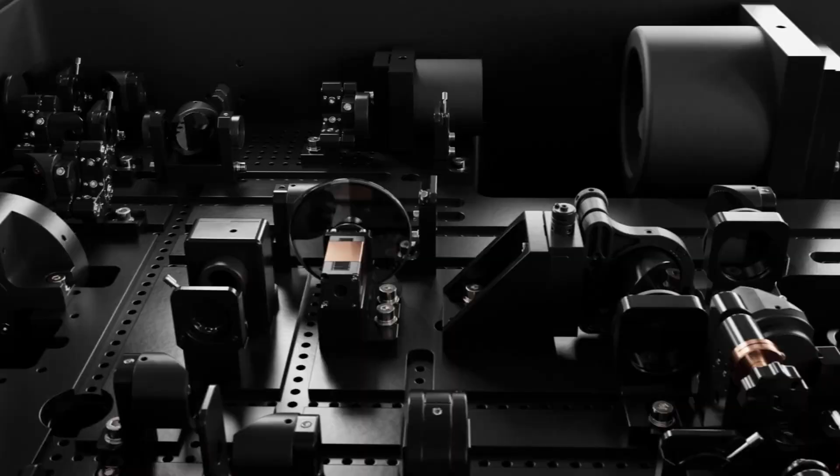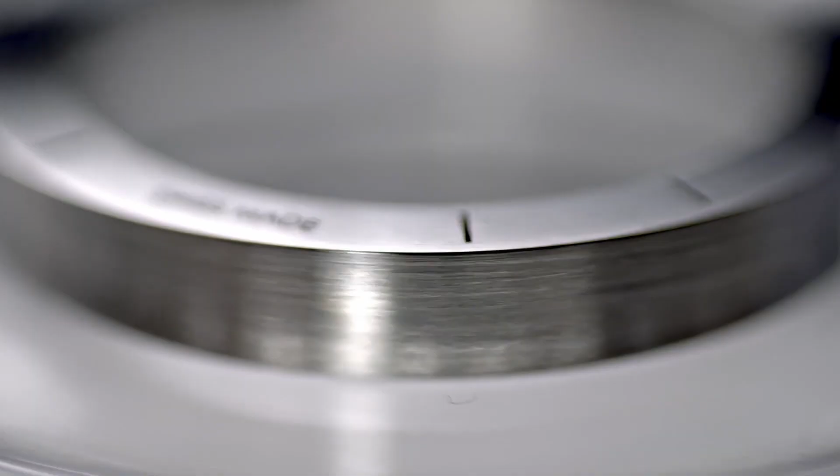Optica is always listening to the changing needs from end users across the world. On Tuesday, March 19th, our 2-hour online industry meeting will examine their needs in laser micromachining. Diverse sectors like automotive, jewellery, watchmaking, biotechnology, semiconductors, textiles, and consumer electronics all have one thing in common: the challenging demands of precision manufacturing are tightly coupled with the need for rigorous efficiency and scalability. But getting things right first time presents formidable obstacles.

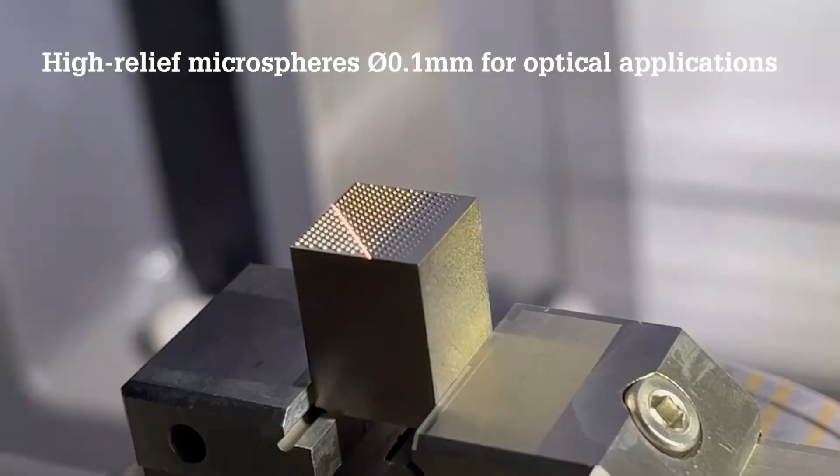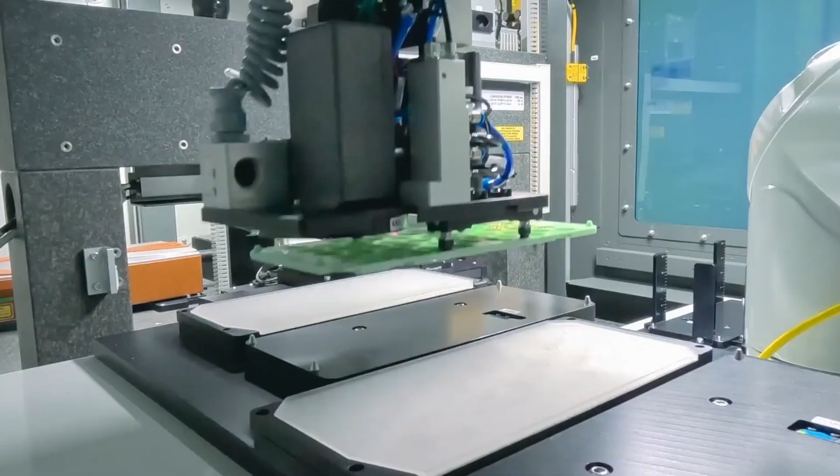Take automotive, where laser micromachining is key in making precise components. There is huge pressure from clients to optimize production speed without compromising quality. That's because product recall is the nightmare scenario for car manufacturers. Similarly, in the jewellery and watchmaking sectors, precision is synonymous with value. End users deal with the delicate balance between achieving complicated designs yet maintaining cost effectiveness.

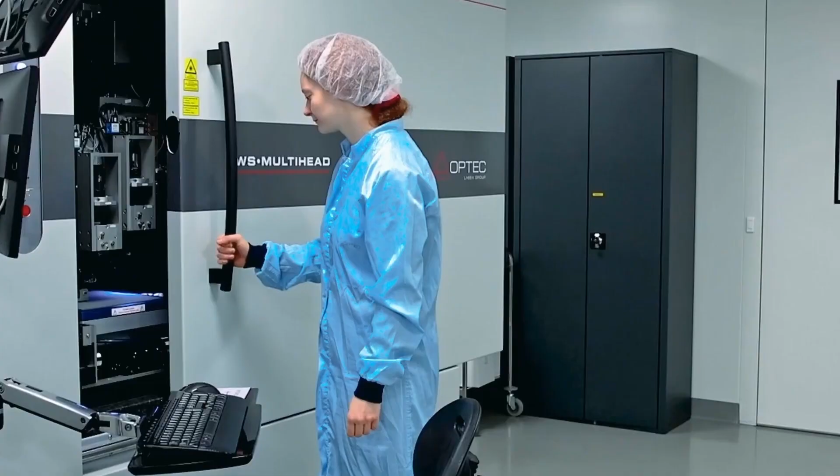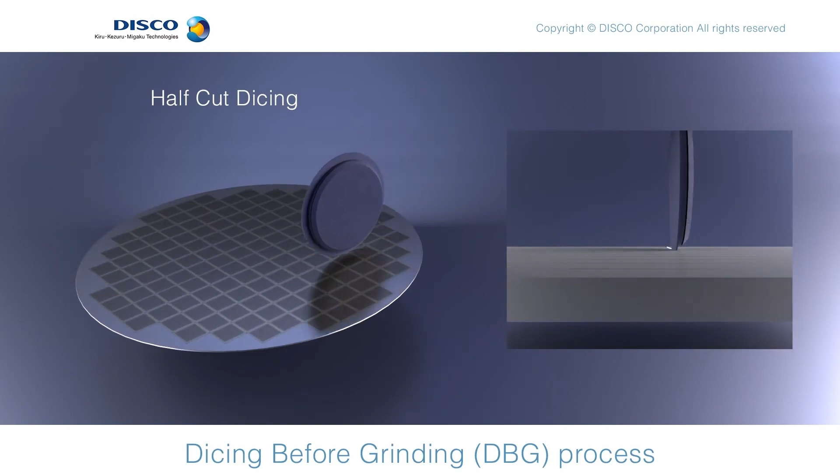And in biotechnology and semiconductor manufacturing, the quest for ever smaller components demands cutting-edge laser technologies capable of sub-micron precision, pushing the boundaries of current capabilities. In the consumer electronics sectors, where smaller and lighter is usually better, partnerships with suppliers offering precise beam shaping capabilities can accelerate sustainable product development.

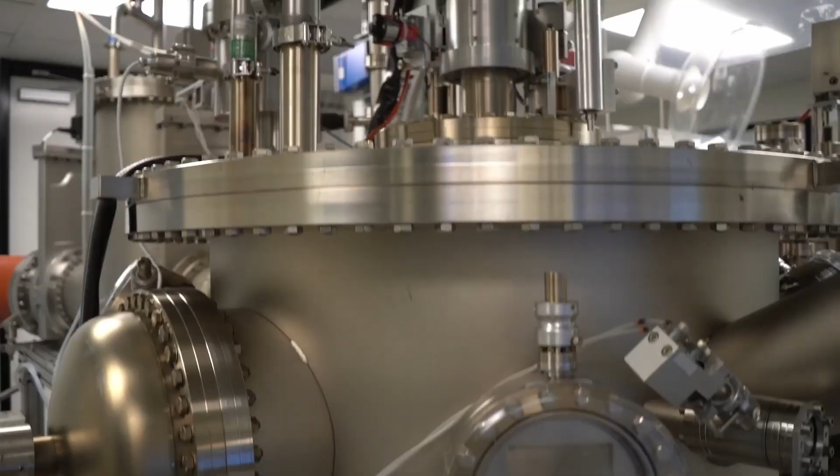So if you are a manufacturer of ultra-fast lasers, laser diodes, specialty fibres, laser optics, if you want manufacturing equipment for assembly and test of laser systems, or if you are looking for the right laser for the right application, then do not miss the chance of making meaningful connections. Prepare your answer to the Optica question and then join us at 7 AM in Seattle, 10 AM in New York, and note the slightly earlier starting time of 3 PM.

On Monday, February 19th, we will hear from the following companies: Akoneer, Disco, Microrayos, Turner Laser Systems, Coherent, Luxinar, Lasea, 3D Micromac, Oxford Lasers, Amplitude Lasers, Cailabs, Direct Machining Control, Litilit, Asphericon, and all the way from Vilnius, Lithuania, Light Conversion. Since to stay ahead you need to collaborate, the Optica question has never been more relevant. So let's start hearing answers now. Indeed, right now, let's start hearing answers.

Thank you very much for joining the Optica online industry meeting on laser micromachining. Today we are global. We have people from all over the world. Over 300 companies have registered for this meeting today. Some of them are joining in the Zoom room, others are joining in YouTube, and most important, all of them are here because they want to connect with each other and find ways to do things they cannot do easily themselves. My name is Jose Pozo, and I'm here talking on behalf of Optica.

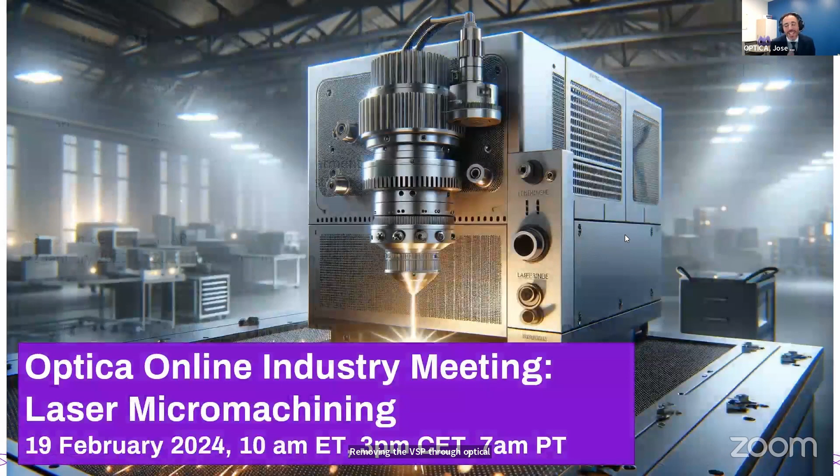As I said in the intro video, we have companies who are the integrators, who come here offering something to the rest of our members - LASEA, Coherent, Akoneer, Luxinar, and Turner Laser Systems - and the companies who come here with an enabling solution - Litilit, Oxford Lasers, Amada Weld Tech, Cailabs, Direct Machining Control, 3D Micromac, Amplitude, Asphericon, and Light Conversion. Our job today is to connect these companies.

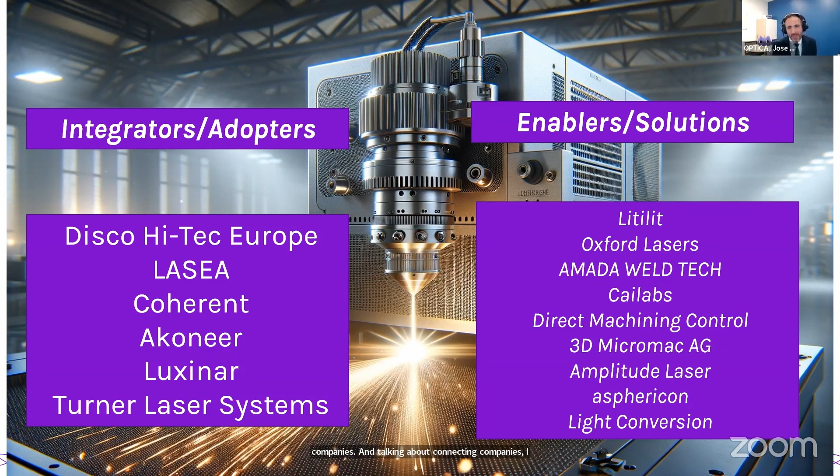Talking about connecting companies, I'd like to tell you about one big initiative of Optica. Many of you have heard this. Optica is building the Global Advanced Manufacturing Alliance. These are all the companies in the Optica membership who are active in optics manufacturing, and you can see them here in the center of this slide.

All our members are looking for metrology, materials, integration into different systems, and that's what we're providing them - contacts with companies who provide coatings, different materials, optical design, software, but also potential customers in the field of laser diodes, photonic integration, data and transceivers, cameras, tomography, everything that companies in optics manufacturing have to do. This is the Global Advanced Manufacturing Alliance.

All the companies in optics manufacturing are going to find ways to connect with potential suppliers and customers. Our kickoff meeting, for those interested, is in Neuchâtel, Switzerland, at the House of Focus Light Switzerland, formerly SUSS MicroOptics, on the 25th and 26th of June. Be there. Let me look a little deeper into this slide.

Let me zoom in on the laser part. Here are the companies who are corporate members today offering laser technology to the optics manufacturers. Thank you very much for all the support. I expect to see you in Neuchâtel on the 25th and 26th of June.

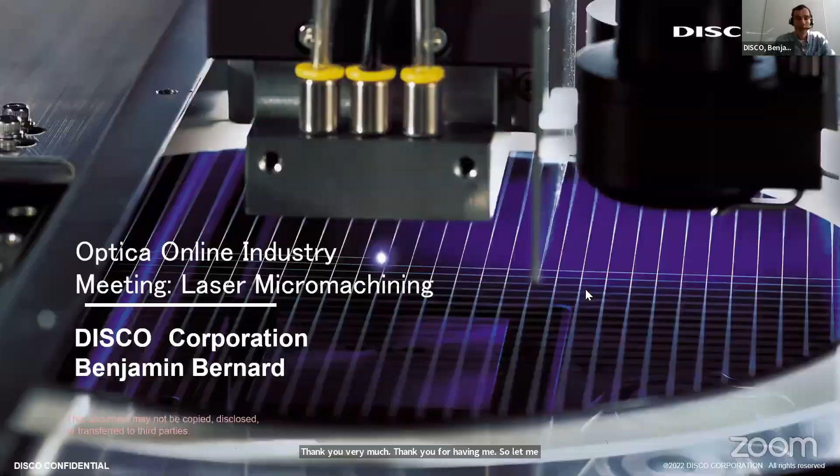Thank you very much, Jose. Thank you for having me. So let me share my slides. Can you see them? Crystal clear. Perfect. Then konnichiwa and arigato gozaimasu for having me here.

My name is Benjamin Bernard, and I'm working for the Disco Corporation. So who is Disco? We are a Japanese company. Our headquarter and R&D center is located in Tokyo, and all our production is in Japan. We have three main plants: the Kuwabata, Kure, and Chino plant. But you cannot only find us in Japan - more or less you can find us everywhere our customers are located. So we have a pretty bright worldwide footprint, as you can see in Asia: Korea, Taiwan, Philippines, Singapore, and China. In Europe, where I'm located, the head office is in Munich, and of course in the US on the West Coast as well as the East Coast. Overall, we have roughly 6,000 employees, and we've sold quite a couple of units already successfully to customers.

So what are our key technologies? We call them KKM. KKM stands for Kiru, Kezuru, Migaku, which means dicing, grinding, and polishing.

Wafer manufacturing process we address, mainly the back-end processes. So grinding of the wafer until you reach the final thickness, then some polishing to have the desired surface condition, followed by wafer singulation and package singulation.

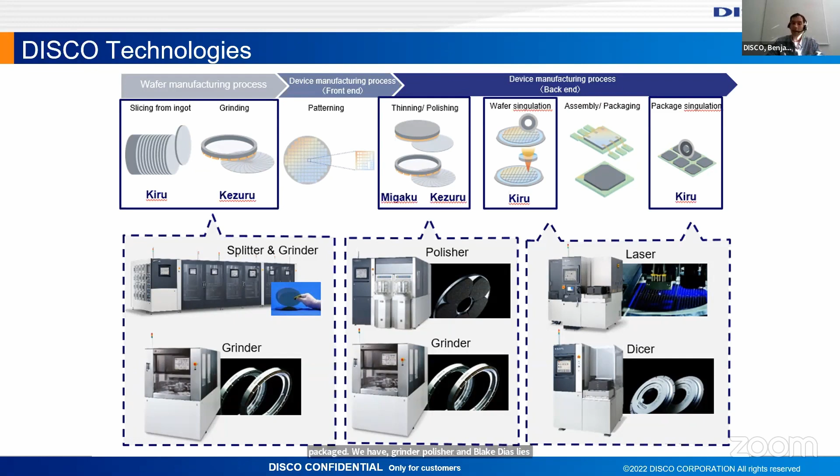We have grinder, polisher, and blade dicers in our portfolio, but I want to concentrate on our laser applications. For the laser applications, we have quite many different approaches.

On the left side, you can see the ablative laser approaches, mainly laser grooving and laser full cut. I will have a slide on it later.

In the center, you see the non-ablative approaches. Here you highlight stealth dicing, where we teamed up with Hamamatsu-san. The idea is to focus inside the material, do a modification, do many of these modifications along your separation line, and then by applying an external stress, you can separate the wafer.

We also have KABRA, which addresses the wide bandgap wafer production. I will have a dedicated slide to that at the end, so I will come back to that later.

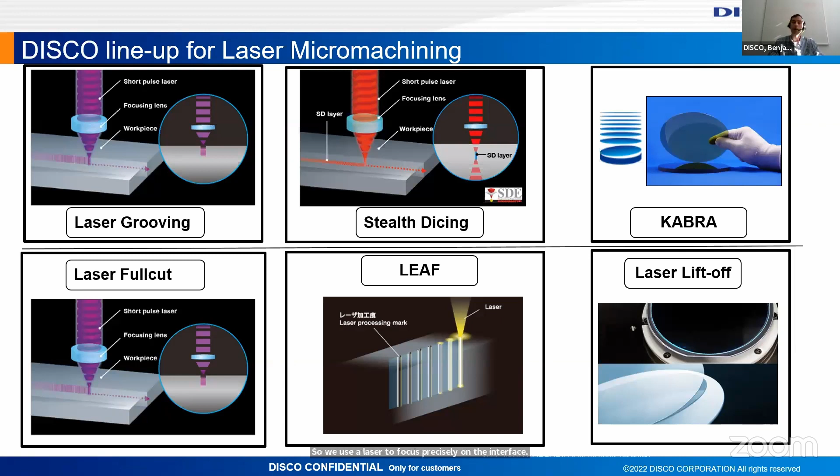Last but not least on that slide, we have the laser lift-off, mainly gallium nitride grown on a sapphire substrate, and then you want to lift off the gallium nitride. So we use a laser to focus precisely on the interface between those two materials, and then you can lift off the gallium nitride layer from your bulk material and transport it wherever you want to have it.

Focusing on laser ablation, and what kind of process strategies are we offering? The main application in the semiconductor industry for the laser is still laser grooving, followed by blade dicing. The laser is used to remove some sensitive top layers or PCM structures like metal structures, gallium nitride that is hard to dice with the blade.

This opens the dicing street for the blade cut, and then you cut the bulk material by the classical blade dicing approach.

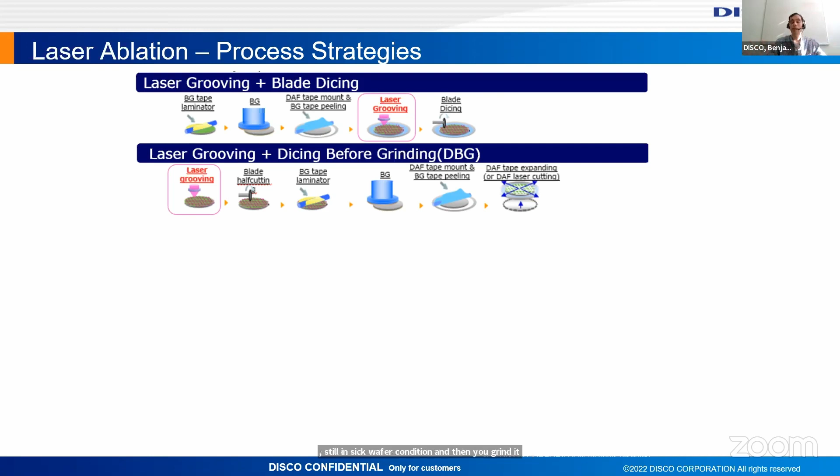Very similar, but a little changed in the sequence, is the dicing before grinding approach. Here you do the laser grooving and the blade half cut, still in thick wafer condition, and then grind it back, and by tape expansion you can release the chips into individual dies.

The third one is the laser full cut. The idea is obvious - you completely cut the wafer with the laser. So you focus on your top side and remove material until you finally cut through.

Another approach, showing quite a lot of synergies between laser grooving and different approaches, is stealth dicing before grinding. We do the stealth dicing modification from the backside. But if you have metals on the pattern side that are hard to expand, then you need to remove them also with the laser.

Last but not least, we teamed up with an American company called Plasma-Therm, who provides plasma dicing equipment - shout outs to my colleagues from Florida. Here the idea is that with the laser we can remove metals that cannot be plasma diced, or also open the resist. You can use our spin coating as a resist for the plasma dicing, and then the laser grooving opens the resist at the positions where you want to interact with your plasma.

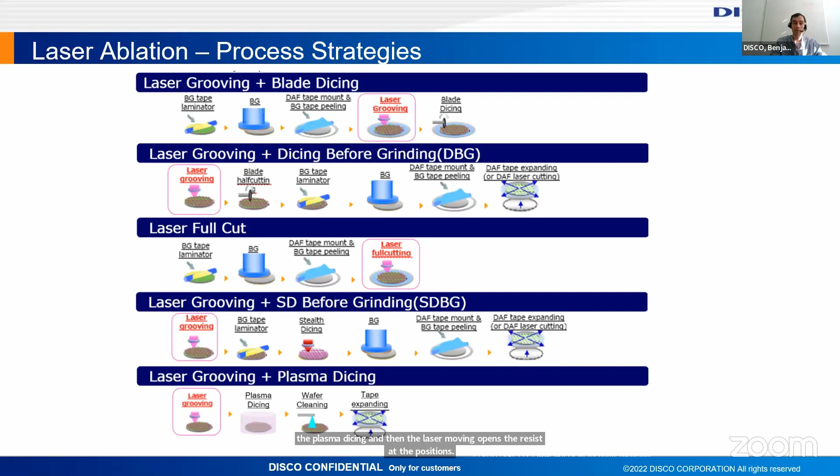One example I want to show you for a classical grooving process is here - gallium nitride, a wide bandgap material. For the grooving process itself, it's key to not create a significant thermal damage zone on your bulk material, because after the blade cut this will reduce the mechanical robustness of the die to succeed the subsequent process steps.

But as you can see here, if the conditions are correctly chosen, then you get very clear and defined cutting edges, very smooth surface roughness, and defined grooving depths. Also for wafer-to-wafer bonding applications, it's important to have very little recast or burr, because this transfers into a larger area that is not bonded on your device.

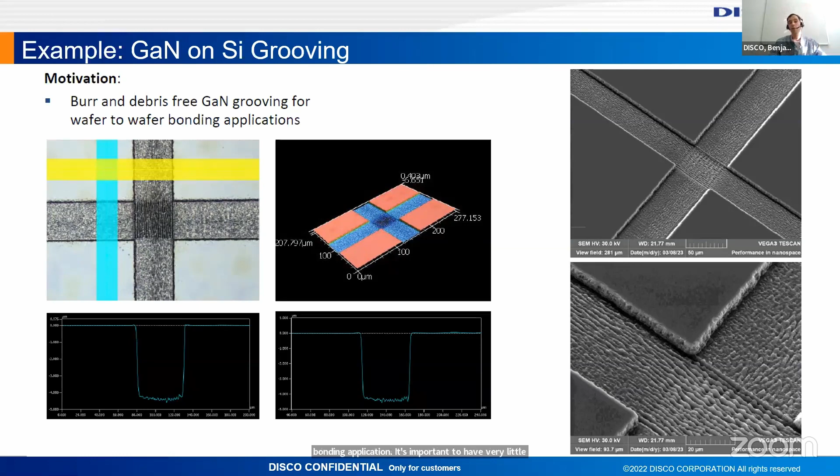The last slide I have is focusing on silicon carbide wafer production. Due to electrification and the need for many inverters, wide bandgap materials gained a lot of attention lately. The classical approach is you grow the silicon carbide in a chamber.

You have a certain boule, and then you cut with a wire the silicon carbide wafers from this ingot. We thought we have a better solution using a laser to focus inside that ingot, creating the so-called KABRA layer. Then by some subsequent process steps, you can get your wafer split from the ingot.

On the image here, you can see our fully automated tool. More or less, you can store several boules, several cassettes for the wafers. Of course, after one wafer splitting, you need to do some reconditioning of the surface to make it optically in good condition again. But this tool can do it all in one line.

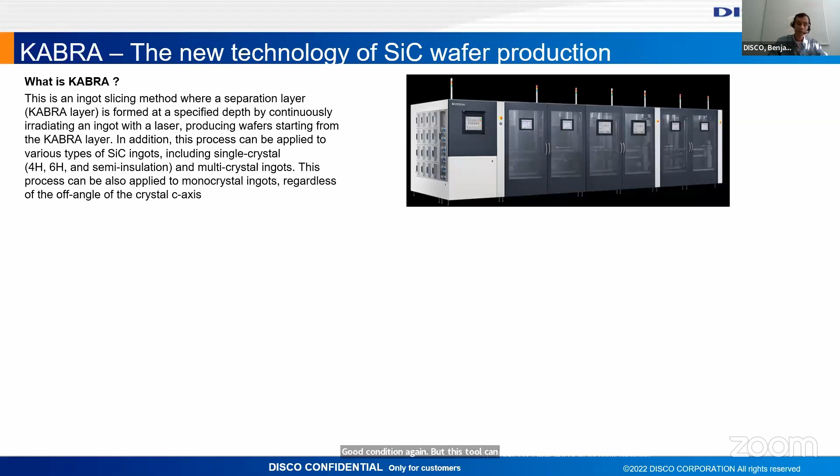Compared to the classical wire saw, we could significantly reduce the process time to generate these wafers. Also, due to the precise and gentle interaction of the laser, we could skip some process steps, so you don't need to do so much preconditioning after the splitting.

And finally, which really is directly money in the pocket of our customers, we can reduce the kerf loss - that means the material that is wasted when you cut silicon carbide from the ingot. So that is our approach for silicon carbide wafer production, and we call that KABRA.

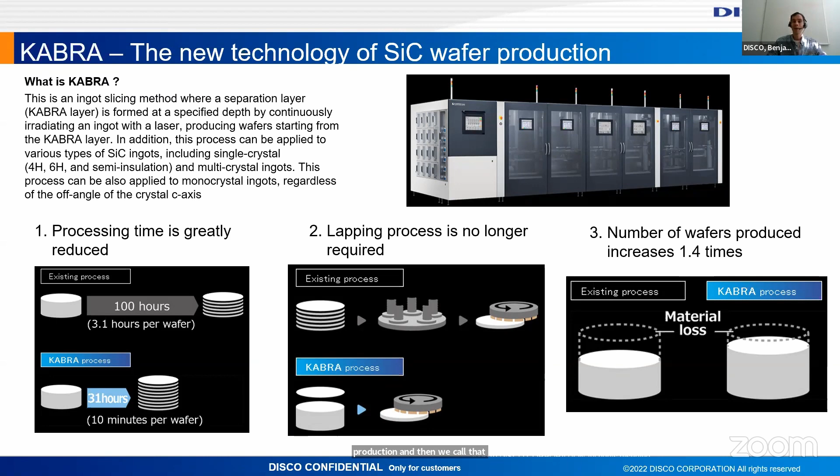Since I just had 6 minutes, I'm almost through. As you can see, we try to work really on the cutting edge. We have good relations with all our customers, and we are able to integrate the newest technologies into the semiconductor device manufacturing market. So please keep in mind: Kiru, Kezuru, Migaku, Disco.

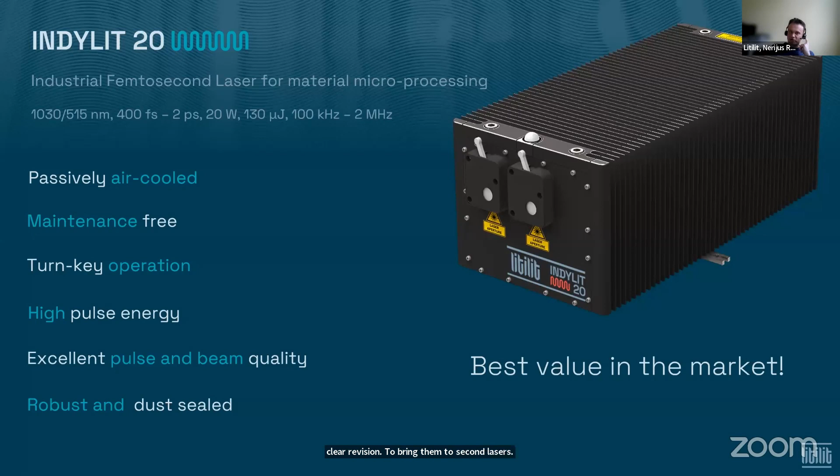So at Litilit, I think first of all that everybody in this meeting agrees that laser micromachining is the future of precise manufacturing, right? So starting from there, our company Litilit has a very clear vision to bring femtosecond lasers, which are enabling technology for microprocessing, to the commodity level. In this way, we seek to advance the industries by offering well-designed, reliable, and affordable femtosecond lasers.

Today, I would like to introduce our newest development, the INDYLIT 20 laser. It has optical parameters specifically tailored for micromachining applications, for many of which medium average power level, but relatively high pulse energy, excellent beam and pulse quality are required. The laser is unique in the market by providing 20 watts of average power and 130 microjoule pulse energy in a very compact, robust, and dust protected, passively air-cooled package. We firmly believe that for... If you want to be convinced, contact us regarding trial tests. This is it from my side.

Thank you very much. One thing that we would like to go back to Disco about: in many different ways, we have been discussing the difficulty of integrating lasers and using standard components. From the point of view of Disco, do you see a challenge? Do you see a potential solution that can be solved by simplifying the laser system? Yeah, I mean, in general, we're trying to keep it as simple as needed, but as complicated as it has to be. So yeah, I understand your question, but hard to comment. In general, yes, simplification is good, but certain process steps need some.

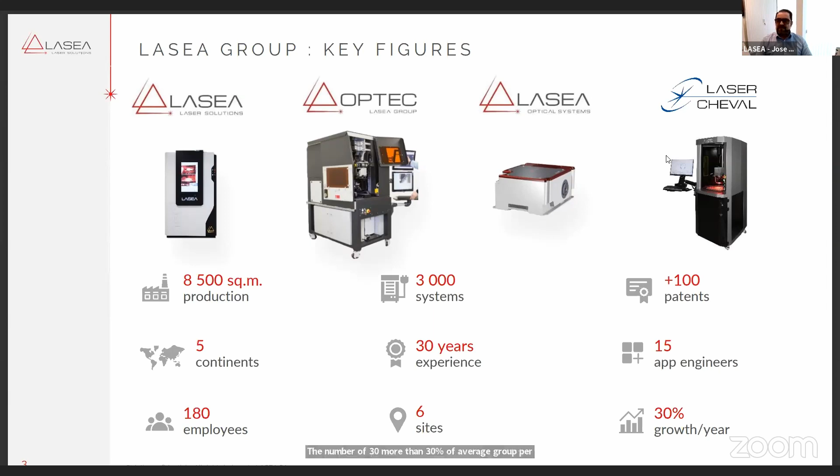We have as well facilities in Switzerland and in the USA. Together with other representatives, we develop our activity on the 5 continents. Here we represent the countries where we have already installed machines, and we have more than 3,000 machines installed around the globe.

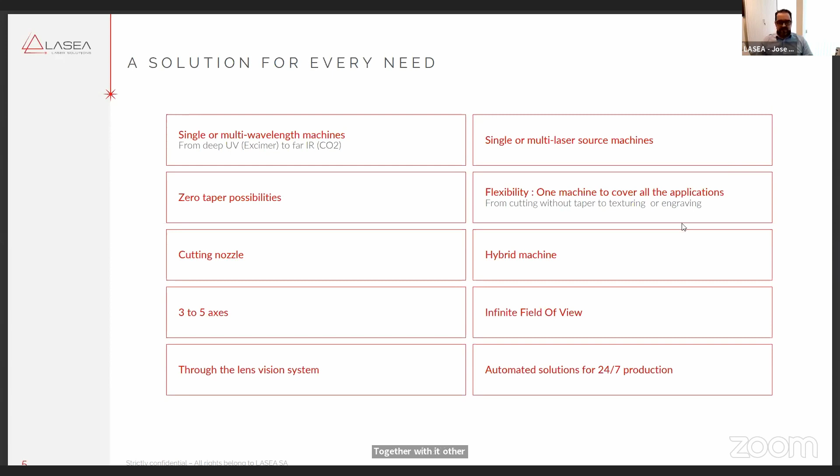So we like to say that we provide a solution, not just a laser machine. We provide a solution that is based, of course, in our expertise, that is very broadly developed around the use of femtosecond lasers. But again, as we say, we provide a solution. That means that sometimes we integrate other types of solutions, other types of lasers, depending on the application, together with other characteristics, and always around providing a very, very accurate laser system, laser solution.

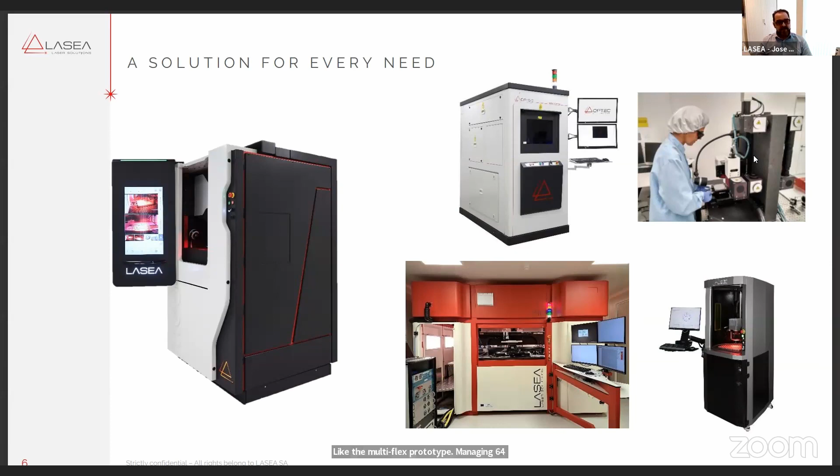How do our laser solutions look, our machines? So these are just a selection of a few of them. For example, on the left, the most recent concept of machine developed for high accuracy and high productivity applications. But we have other solutions, for example for research, or developed in the frame of research activities, like the MultiFlex prototype managing 64 beamlets in the same system that is installed in Aachen at the Fraunhofer ILT as a result of an R&D project.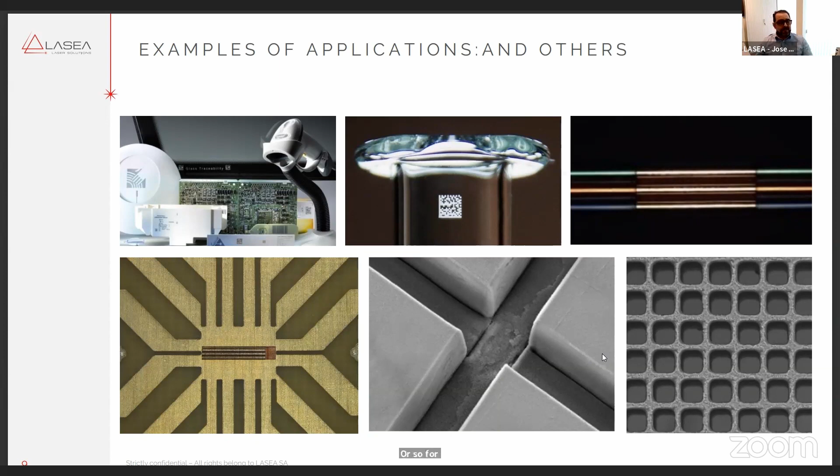To conclude, we provide efficient and reliable high-precision laser solutions for micromanufacturing. Our solutions replace more polluting production methods, so we help in achieving more sustainable production. We help as well in developing solutions in the area of miniaturization or functionalization of surfaces, allowing the design of new, more efficient or improved products. We do this using cutting-edge technology and with a collaborative and innovative spirit. All this helps us provide laser solutions that help progress the field of microtechnology.

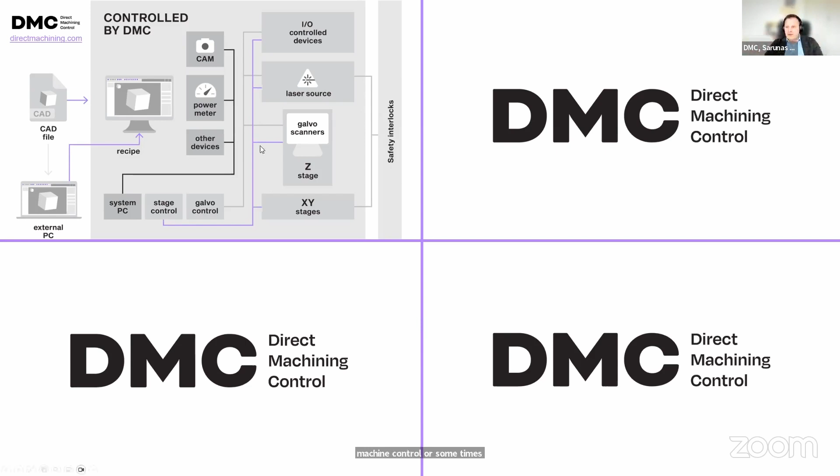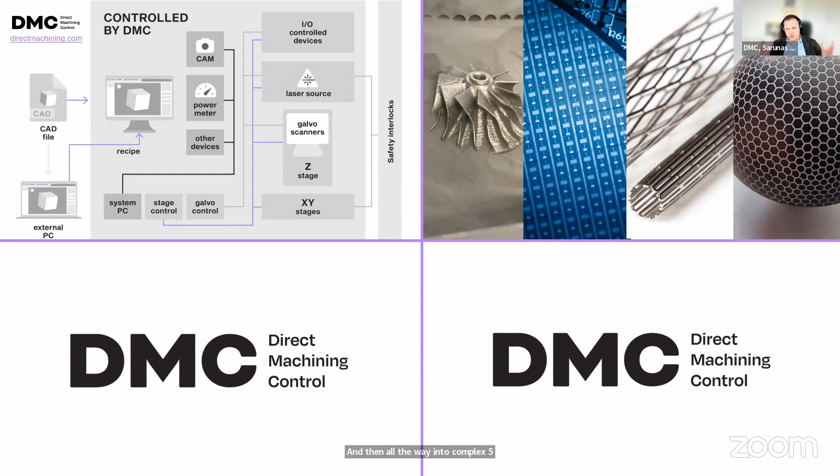The applications that we support are very wide ranging, from additive manufacturing to various laser micromachining cases in semicon, medical, electronics, and then all the way into complex 5-axis system control, freeform surface processing, sometimes involving robots. And in terms of capability, DMC can easily handle simple applications, but it has a lot of advanced capabilities: freeform shape processing, kinematics, working with 3D CADs, the integration of sensors, scanning the surfaces, adapting processes based on that, camera integrations with machine vision.

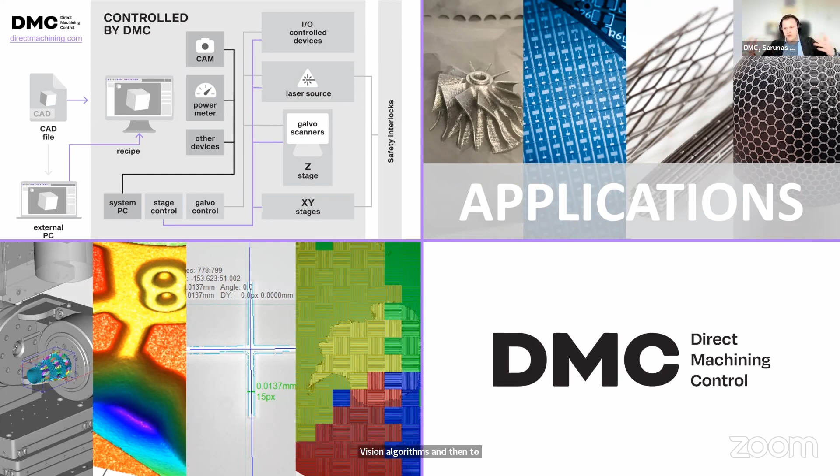DMC has its own vision algorithms, and then to complex control where we can control multiple systems simultaneously, load balancing, special strategies, or cases where we need to process millions of objects, rows to satisfy some throughput requirements.

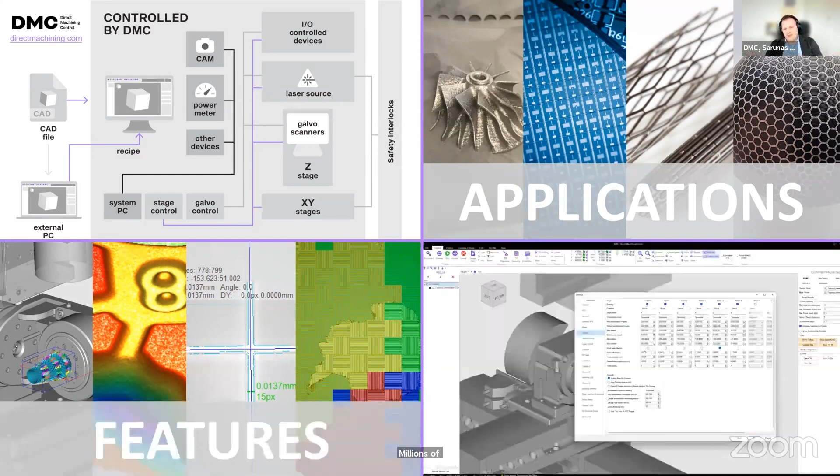And then the last question, how can you use DMC? And there are 3 ways to do that. You can start with a standard interface, which is very flexible and perfect for application development. Then you can, of course, integrate that into your own application, or we can develop a custom HMI for you. So basically, DMC can take care of the whole way from application development all the way to the fully integrated industrial solution. And that's my quick intro of it.

Thank you so much, Sarunas. So this is very good because actually we have here a lot of lasers. So coming back a little bit to Brennan. So Brennan, what exactly do you need from the lasers? What do you need from the laser manufacturing?

Well, most of our applications today require femtosecond lasers. It was discussed before, but we do focus on very clean, very short pulses. Some of the applications are so sensitive that the difference between a 250 femtosecond pulse and a 500 femtosecond pulse is actually notable.

And then from the controls side, we're finding more and more that we really need advanced control systems, not just for motion, but also for coordinating the motion systems with the advanced galvanometers, multi-axis scan systems. So really the full range of integration equipment is essential to making sure that our systems work properly.

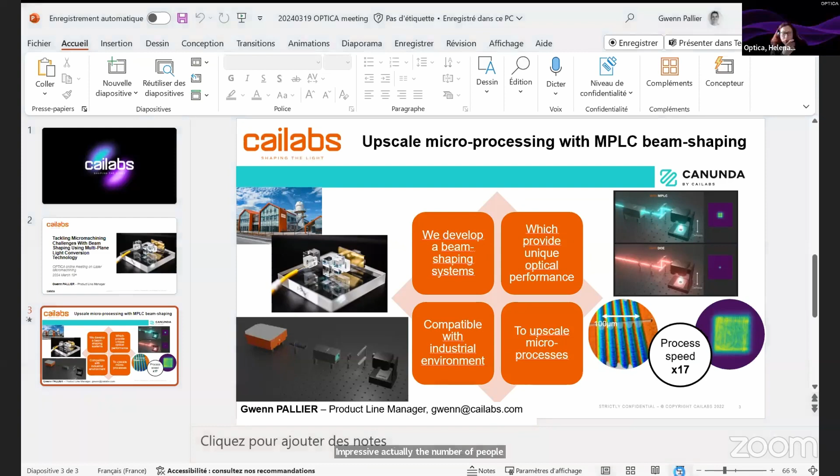Hi, Helena. Can you hear me well? Very well. Perfect. Give me a second to share my screen. It's really cool to be here. Hi also, Jose. Always nice to spend time with you guys. Impressive, actually, the number of people who join. So, okay, your sound is a little bit distorted now. Sorry. Can you hear me now? Now better. Okay, cool. Is it full screen?

Yes. Okay, perfect. So Cailabs in short, you can recognize, Helena, the building on the top left. This is where we are. We are actually a French company developing beam shaping systems. What we developed since the beginning of the company 10 years ago is what is called MPLC, for multiplane light conversion. And this is what you can see on the left, an example for telecommunication.

The idea is to provide something which is quite unique. I have to make it short, so I would just say that this is not a DOE, this is not freeform optics, this is not beam shaping in the laser, this is multiplane light conversion. And it provides different performance, optically speaking. You can see, for example, on the top right, an image when you're defocusing with a system of ours or with something based on diffraction, the beam will behave very differently due to the technology behind the beam shaping. So because you have different performances, it can also enable different things.

And the idea is also to develop solutions which are available and compatible for the industry and the constraints of being inside the industry. So I'm pretty happy that I can come after the laser talk, because in my opinion, kilowatt lasers are the future, but they need proper beam shaping, because one beam with so much energy, because generally it goes with high energy, not only high power, is actually pointless. I guess everybody agrees on that in the room. And the idea is to shape it properly.

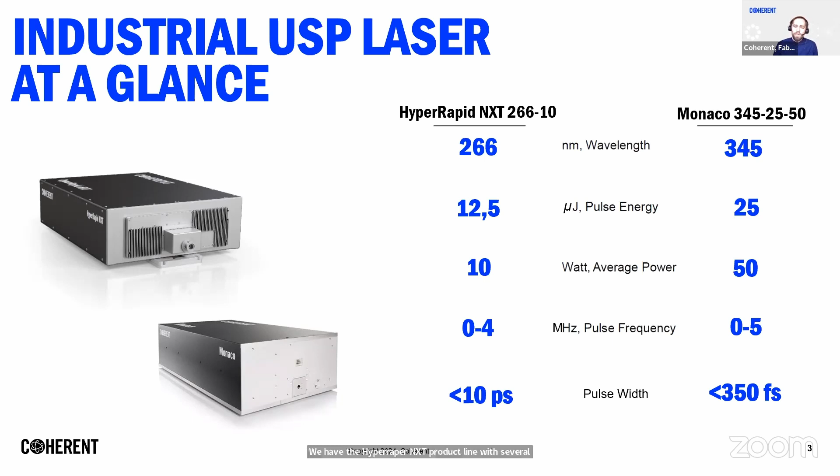Focusing on two products, and specifically in the solid state design for lasers. We have the HyperRapid NXT product line with several thousands in the field with the 266 version. We have the Monaco femtosecond laser with a UV version. And of course, I would say today the pinnacle of solid state lasers being the Python with up to 2 joule single pulse energy or up to 4 joule with the twin Python.

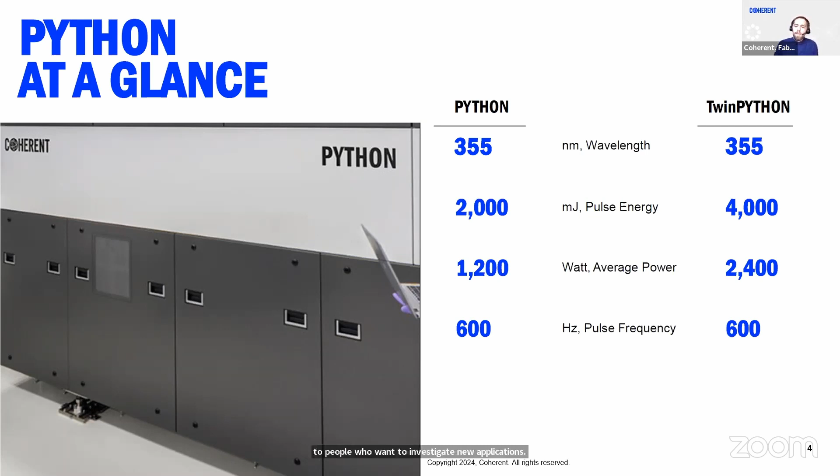So these are the sources that Coherent can provide, and we are really with a strong expertise in designing these laser systems. However, what was really needed to help the industry move along is a center or a place where these lasers can be made accessible to customers, to people who want to investigate new applications. So 6 years ago, Coherent started a cooperation with the ILT Fraunhofer, first for excimer lasers, and 2 years ago, we expanded this cooperation to include ultra-short pulse lasers as well.

The idea here is that the expertise of Coherent providing these lasers, designing these lasers and making them available to the ILT Fraunhofer in Aachen would be combined with the capability and knowledge of the ILT when it comes to system technology, robotics, and specifically to diagnostics and analyzing applications. So today, the ILT Fraunhofer and UV Center of Excellence on site have multiple laser systems, not just standing around, but actually in tools available to researchers, available to customer requests to investigate cutting-edge applications, but mainly investigating the next generation of laser micromachining applications.

And this with comparing UV with deep UV, comparing femtosecond with picosecond, or directly comparing ultra-short pulse lasers with excimer applications. And this is something that is not easy to do elsewhere in the world. There's only a few places where you can really do this with the same samples on the same ground, on the same conditions, making one-to-one comparisons.

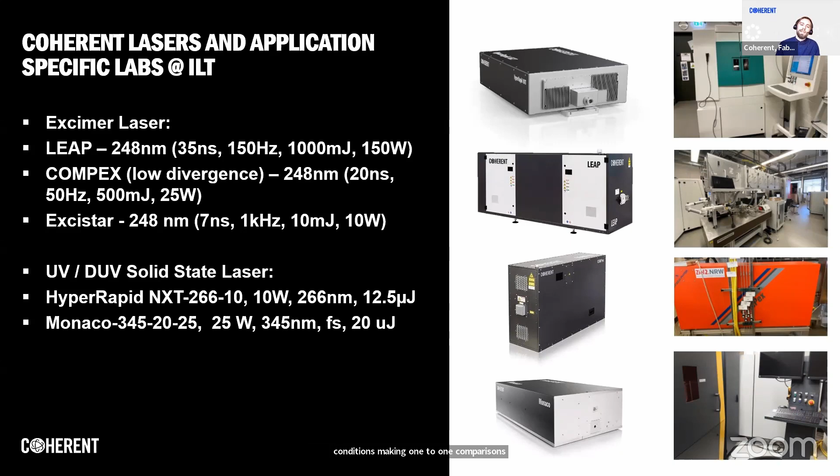And a few examples of application results are shown here, where we have, for example, Benjamin talked about it from Disco. They're doing this as well. This is a real application today already in the industry, laser liftoff of gallium nitride for transistors. And this is, to a degree, an excimer process, but you can do this with ultra-short pulses as well and potentially achieving better quality.

But getting a real direct one-to-one comparison about throughput, speed, and quality is not easy to achieve. The UV Center of Excellence can do this today and get to real good results and see what benefits there are for different technology.

They're investigating polymer structuring with 2D phase masks, creating really small structures, in this case 350 nanometer structures on a 950 nanometer period with 1 million structures per second. They're investigating this with both excimer and deep UV USP lasers to identify what benefits each technology has.

It's rather interesting because it's not only driven by a clear customer demand or business case, it's also driven by the question: what is possible today? What are the edges of what we can achieve with this technology? What might be interesting to follow up on? That's a resource that is really valuable, and having the time and resources to ask these questions and get answers has been really valuable.

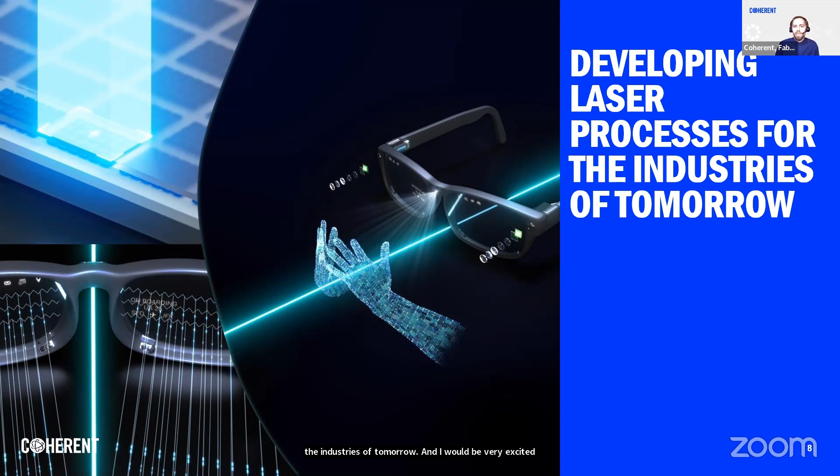So to close out, the cooperation between Coherent and the ILT Fraunhofer is dedicated to developing laser processes for the industries of tomorrow. We'd be very excited to have you join us and work with us at the UV Center of Excellence.

Thank you. For anyone who has been to Aachen, next time you go there, visit Fraunhofer ILT and visit the laboratories. It's simply fascinating. Fabian, representing Coherent, one of our key star corporate members.

What can we do for you? What can you do for us?

Well, what we can do for you, in the context also of the UV Center of Excellence, I think what we can provide is cutting edge laser technology with industry-proven laser designs. And with the UV Center of Excellence, we can provide a location where ideas can be tested, where new process ideas and new applications can be investigated on a very high level very early on. So that's something we can provide today, and we'd be very interested to work with customers.

Again, we cannot have a meeting on laser micromachining without having one of the industry leaders in the room, a person who most likely is going to want to talk to you about some R&D cooperation and the lab: Uwe Wagner from 3D-Micromac. Thank you very much for being with us today.

Uwe, are you with us? Yes, he is. Yes.

Thank you. So what is 3D-Micromac? We are setting worldwide standards with our laser machine solutions for a wide range of different applications in the field of laser micromachining. We typically develop, with a huge group of engineers, innovative processes with and for our customers.

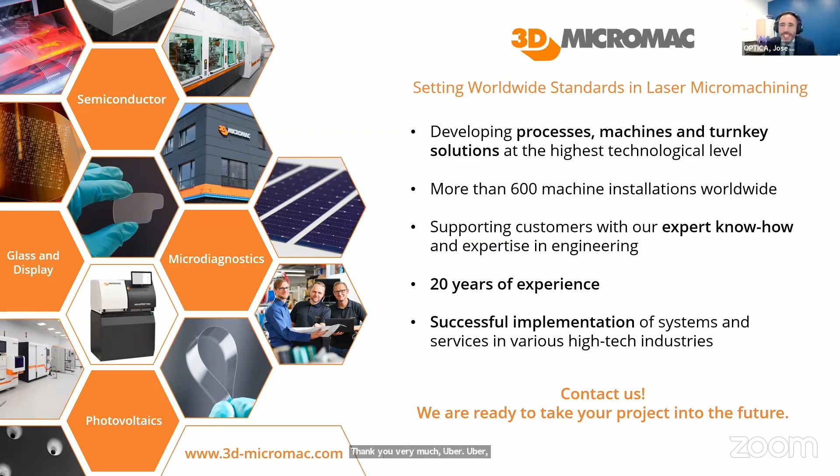To start that debate, allow me to go to a company that few of you have heard before. This company is called Marco Laser Solution. Who has heard of a company called Marco Laser? I have. So Jose, Helena, allow me to give the floor to Dr. Reddy.

Dr. Reddy, you've posted a very interesting question in the chat. Could you voice that question yourself? Hello, am I audible to everyone? Yes, we can hear you.

I'm curious to know, for a given laser system, for a given laser source, which optical module is best suitable for what thickness? Has anyone done any comparative study? Especially comparing holographic or diffractive optical elements with Cailabs' MPLC beam shaping solutions. We may be comparing apples and oranges, but I want to get the feeling of the integrator, the end user.

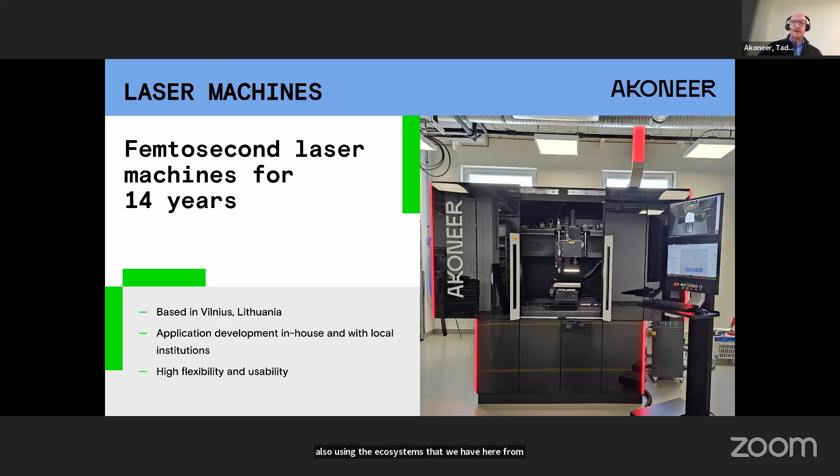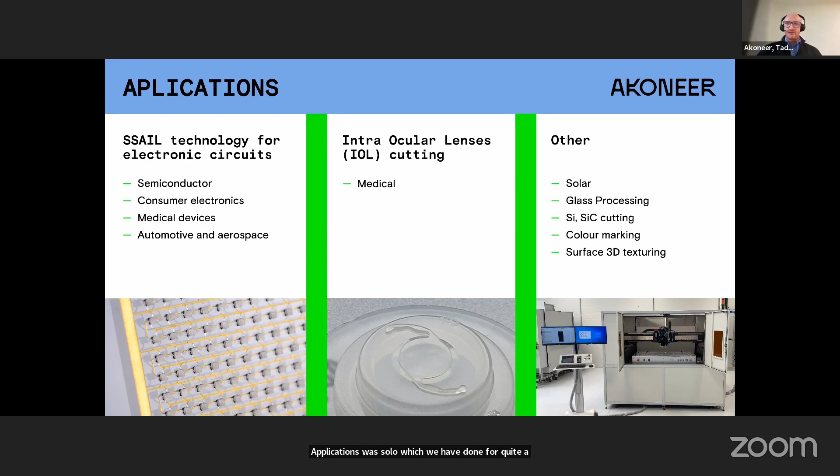And specifically, now we focus a lot on SSAIL technology. I'll talk a little bit more about it, but basically we can selectively plate copper on any material. Also, one of the interesting areas we are looking is intraocular lenses, what Lasea also mentioned for medical applications. And then what we could say more traditional applications with solar, which we have done for quite a long time, and glass, semiconductor materials, color marking, etc.

Now, what we see in the laser micromachining market is that a lot of the applications and a lot of things are becoming more and more mature, and it's more of the same, I would dare to say, where we are doing the same processes, but doing it faster, cheaper, and not necessarily new.

And the new applications that are coming are not necessarily something new being done, but becoming commercially viable, because we can do that at a larger scale, cheaper, or a little bit better, because of the growing laser power, which in the last 10 years, probably for the same amount, 10 years ago, you could buy a 4-watt femtosecond laser. Now it's 40-watt. We have beam splitting. We have beam shaping for using all those high powers.

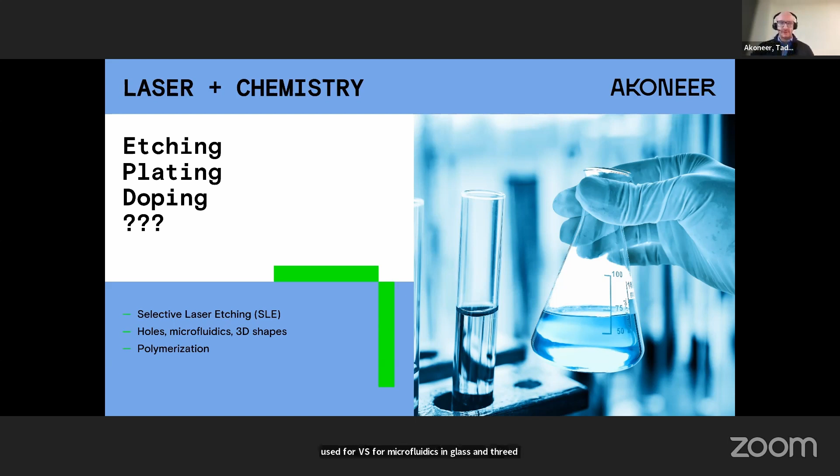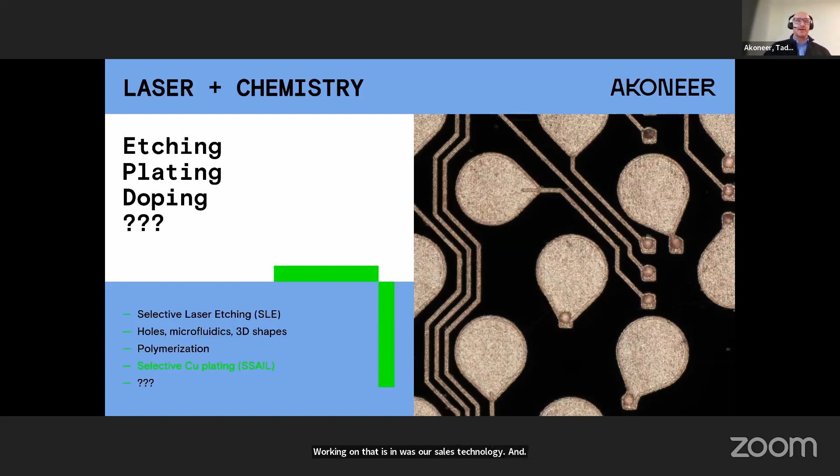So of course, we have selective laser etching, where it's now used for vias, for microfluidics in glass and 3D shapes. We have polymerization for some nano printing applications. Where we are working on that is with our SSAIL technology, where we selectively plate copper with the help of laser. And probably there are some other applications, and it would be interesting to see some new developments in those interdisciplinary areas.

With our SSAIL technology, what we do, we structure the surface with a laser, and then when it goes into the chemical process, copper sticks only where we did the laser processing, and we can do that on pretty much any dielectric material. So on standard electronic materials that are used currently for PCB, or on other materials that are coming into the electronics market, like glass or ceramics, a lot of different polymers that are now used in semiconductor packaging.

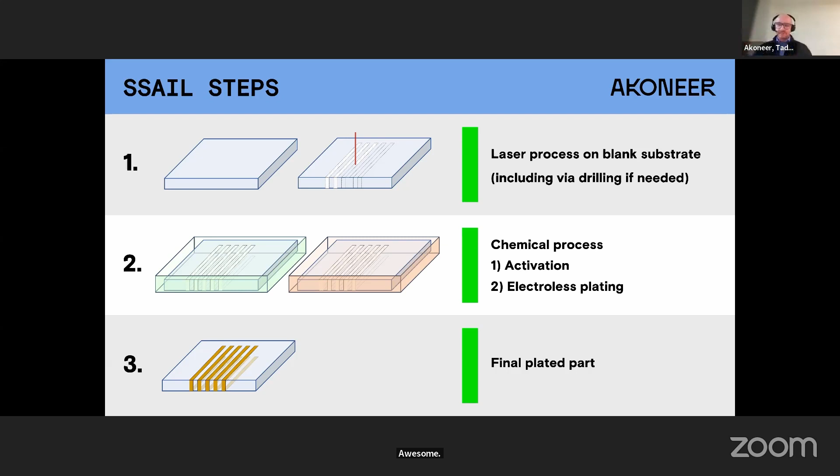And that's how the process looks. So as I said, really a mix of laser process and chemical process. And what can be done - we see that area as one of very high potential areas, and potentially a big breakthrough in electronics manufacturing and also in semiconductor packaging as well.

And I'm pretty sure that in that area between laser micromachining and combination with something else, there must be some other applications as well that are not yet found out. So I see that as a very interesting area to work at and to look for new applications. So that's my short point that I wanted to bring to the meeting.

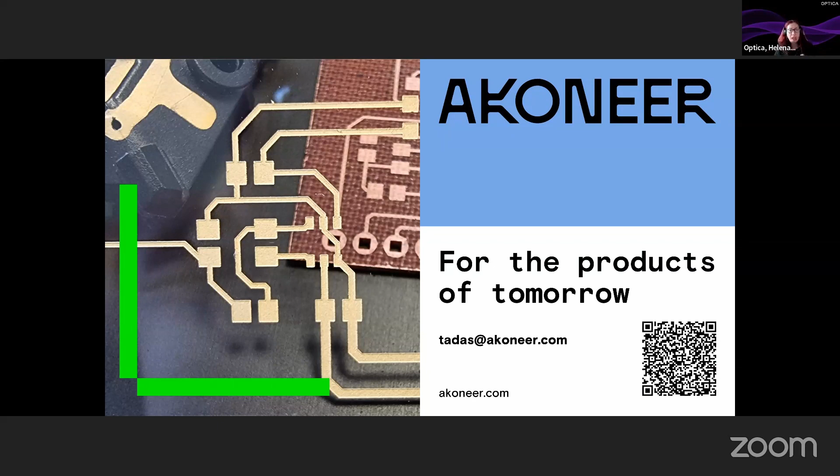Thank you so much, Tadas. That's actually a very good question, and this is like we heard it before - where is this laser micromachining going? So, what is going to be the future? What is going to come? What is going to be the new advance, the new technologies, or the new applications in this case too? So, my question to you is, for the people here on the floor, what do you need to move forward in laser micromachining? What are you looking for in new applications?

Obviously, laser source is always a big component. I think we are quite well covered with the local manufacturers as well. But also all the beam shaping and faster scanning solutions where the throughput could be increased - that's a very interesting area. Another interesting area is beam monitoring, for what's really happening on the sample when we are fabricating, so we can make a closed loop fabrication and really control the process and make sure that it's correct the first time.

So we have here in the room from AKS, Marcus. Marcus, do you have something to say about how to do the monitoring of the beam? Marcus, are you available?

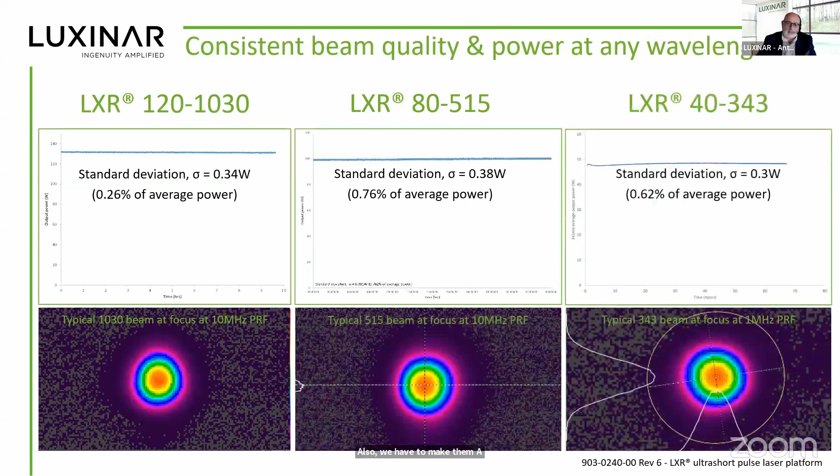Clearly, there are also some important features that are the laser features, like beam quality, power stability, and so on. But this is also important when we speak to end users or to people that would like to use lasers. It's important that we start to speak their language. So, if we are laser specialists, we have to provide some solution with several choices on the power level and the wavelengths. Also, we have to make them an easy life. They should not be worried about the laser. So it's very important to have very stable and consistent beam quality. So the end user should not be concerned to check what the laser is doing.

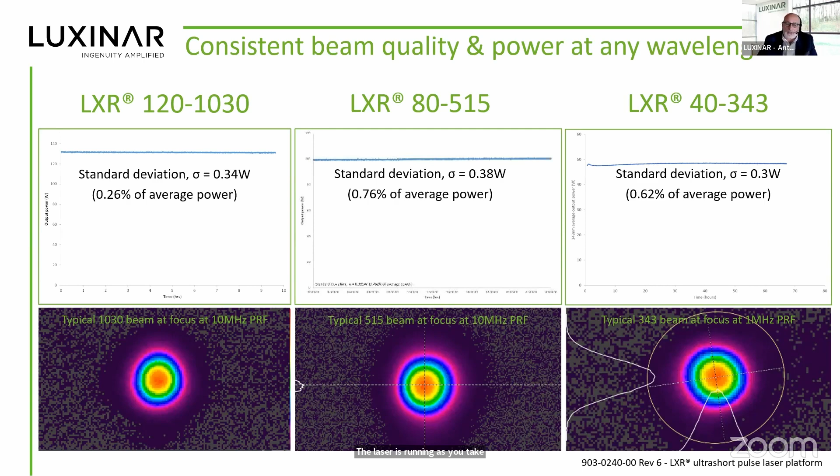The laser is running as you take a car, and what is a car doing? Just bringing you around. You do not have to take care too much about the details of the car. Clearly, as a car, you step into the car, you warm up the car 5-10 minutes. In the case of the laser, here we are speaking about 15-20 minutes, and then the laser is repeatable. Repeatable after 2 minutes as well as after 60 minutes or the day after. When you switch off the experiment or the production, the day after you start from the same point. And this is probably something that is underestimated.

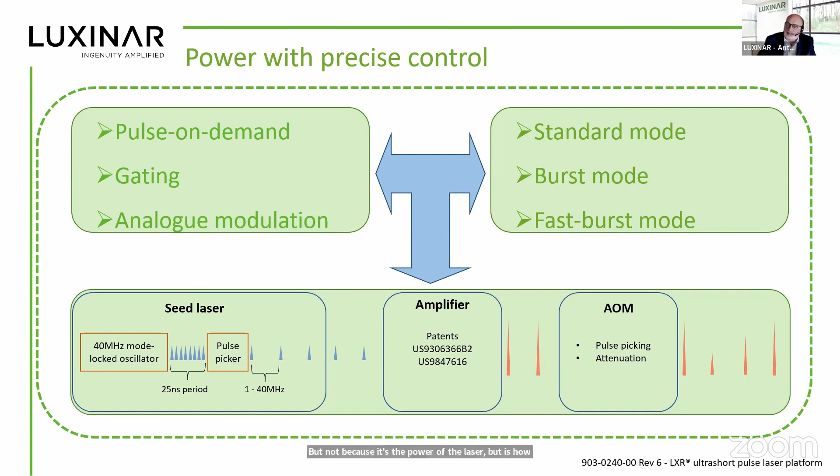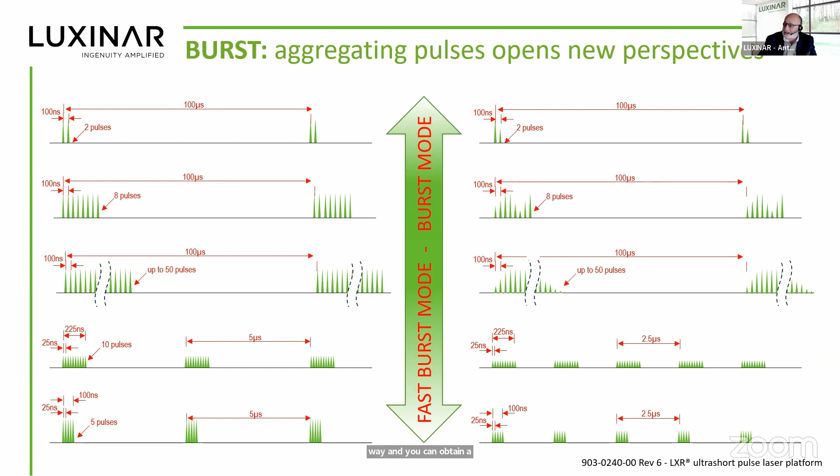Power. Most people are speaking of power, but it's very important to control the power of the laser. Not because it's the power of the laser, but how you deliver the power into the working piece, on the piece that you have to machine. So the control is very important, and also how you control it with the machine. A key feature is how you deliver the pulses in time. Here you can aggregate pulses in bursts, and also you can edit the single pulse in the burst in a different way, and you can obtain very different ways to put the energy into the part, and these are driving the quality of the resulting processed parts.

As I said before, it's important to make it easy to work with the laser. Honestly, I am in love with lasers since 35 years, but the laser is nothing else than a tool. So we must really put it to the lowest level and make it easy to work. And the LXR platform has 2 levels. Let's say the standard user level, with very easy to manage features and functions. And then there is the advanced user, like the people from maintenance as well as from R&D or process engineers, they can work more on this level.

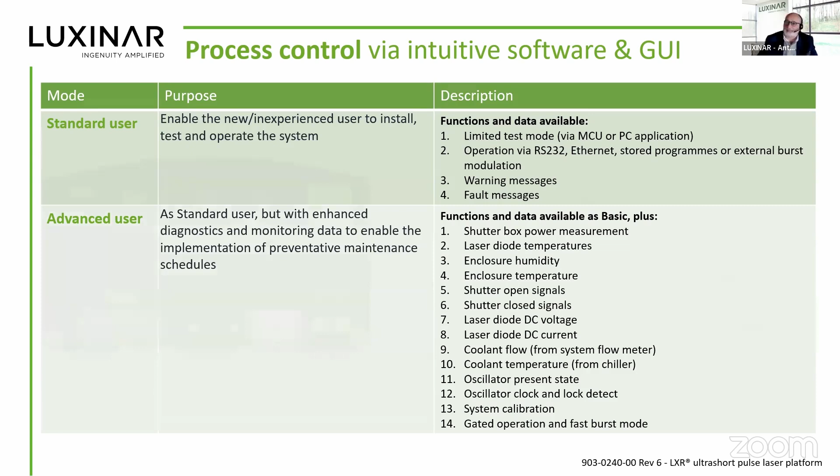Laser is a tool that normally is integrated into a machine, so it's very important to think of an easy integration. So the interface probably is redundant, so here you can drive the laser in multiple ways, and the key point is how you synchronize, how you control the laser from the machine.

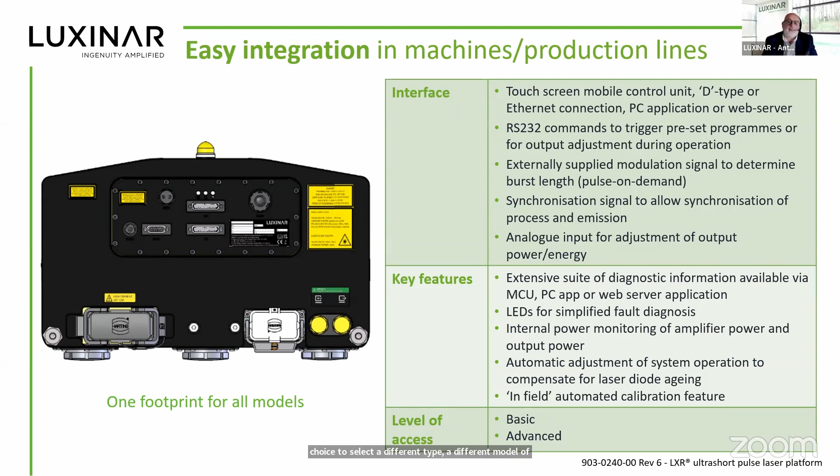Just a simple note: also very important is the footprint. It should be very easy to put the laser into a machine, and also to have the choice to select a different type, a different model of laser without redesigning the machine. So the platform offers the same footprint for every type of model and every level of energy.

Okay, here we've spoken already about applications. So really the potential of a laser, and especially of ultra-fast lasers, is limitless. It's not the matter here to discuss. So just briefly, let us know your needs. Let's talk together, and we will provide a solution, the solution to solve the problem of the customer.

Thank you so much, Antonio. Luxinar has been proven to do all the laser micromachining very well, all these applications with high precision and basically no waste, which is also another part of it. We actually have a question from Ila from Fluence. So Ila, can you open your mic and ask yourself?

Yeah, hi guys. We focus on burst modes, and I'm curious what's the intra-burst interval in Luxinar femtosecond lasers, because it can be beneficial in this industry to avoid plasma shielding if you can control the intra-burst interval. Yeah, so the intra-burst distance is 25 nanoseconds. It's 40 megahertz, the seeder. And the inter-burst minimum separation is 200 kilohertz.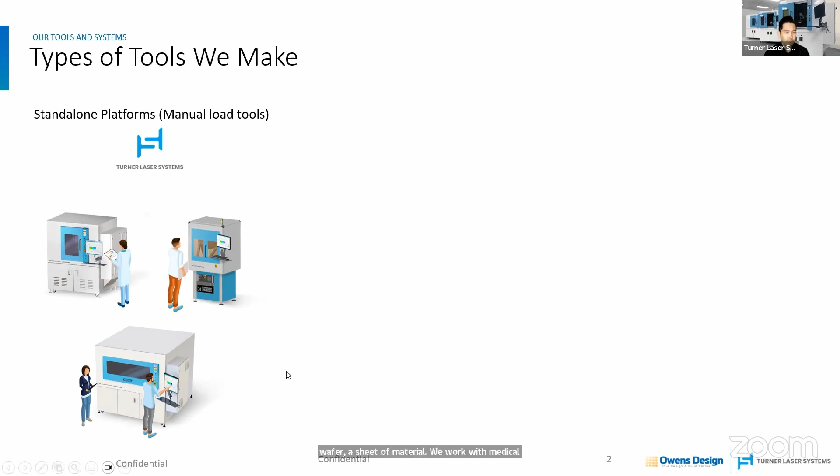just very briefly, the types of tools we make: standalone laser micromachining tools. So these are manual load tools where you can input a wafer, a sheet of material. We work with medical devices, variety of different materials. For micromachining, we also build fully automated systems.

Often these standalone tools are then partnered with things like a wafer front-end module if you're working with wafers or solar cells. We also build fully custom automated robotic solutions as well to be used with these laser micromachining systems. And then we can also build fully 100% customized laser micromachining solutions for a variety of applications. It really depends on the application what type of equipment would be best to support it.

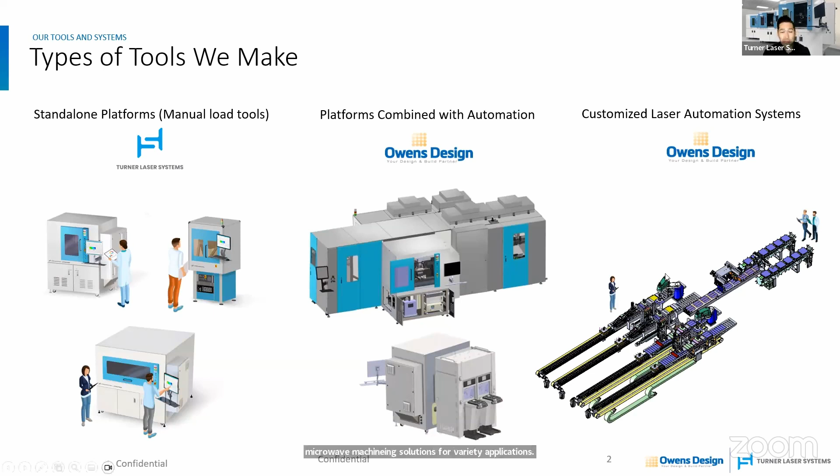So, one of the wonderful things that we see here in the micromachining space is that it gets to serve a variety of different industries. Based here in the Bay Area of California, we see a lot of work with medical devices, particularly medical implants, semiconductor applications. Battery is a very hot area right now where we're seeing a lot of new materials, a lot of very challenging materials to process, and micromachining has a huge role to play in the battery and energy industry as well.

For solar manufacturing, particularly scribing and dicing of solar cells, we're seeing a lot of micromachining applications there. And of course, consumer electronics, display, VR, AR, they all have manufacturing challenges that leverage micromachining today.

So, the types of lasers, optics, processes we work with, kind of listed a long list of applications here. I'd say at Turner Laser Systems, we primarily work with femtosecond lasers and picosecond lasers. So it's great to see a lot of conversation here today on those. But we still do a lot of work with nanosecond, fiber CW, and CO2, often as a complementary laser source to the ultra-fast lasers.

And the types of processes we'll do involve many different types of processes, including ablation, cutting, dicing, drilling, etching, micromachining, welding as well, to just name a few of the core processes that we'll work with, and across a variety of different form factors.

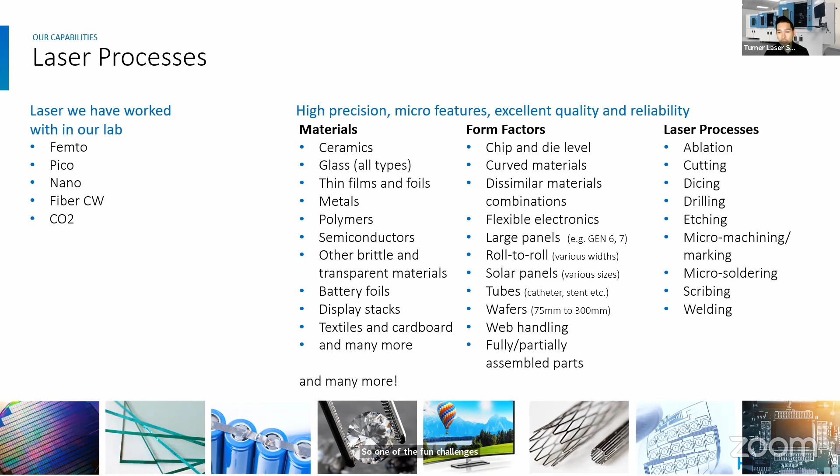So one of the fun challenges we have in the automation space is working out how do we not only use the lasers, but how do we bring the materials and handle the materials in unison with the lasers and bring it all together. So something I'll talk about a little bit differently today, instead of diving deep into the types of applications and processes, a little bit more about the philosophy for how we approach this.

And I think this is very complementary to the discussions that we've been having today on optics and lasers: how do we go from, all right, I have this application, which maybe, we were just talking about glass cutting before and using different optics there. How do we go from these creative ideas to a solution that's ready for 24/7 industrial manufacturing?

And one thing I'd like to share with you today is our phased approach that we highly recommend to use in the industry, because there's often a big gap between a quick test that's done in a laser lab or applications lab and having the solution ready. And we often like to break this into critical phases. Really it's a program management approach where we look at the risks, we look at all the challenges that manufacturing would have. And this is a really critical step.

We don't just look at the laser processing side of things. We also look at the manufacturing side of things as well. Things like, how are materials going to be fed in a manufacturing environment? Do we have tolerances to the materials, different thicknesses of materials as you go from batch to batch? All these really critical nuances in manufacturing that are really important to understand, and I really recommend for those of us in the laser industry to work very collaboratively with automation.

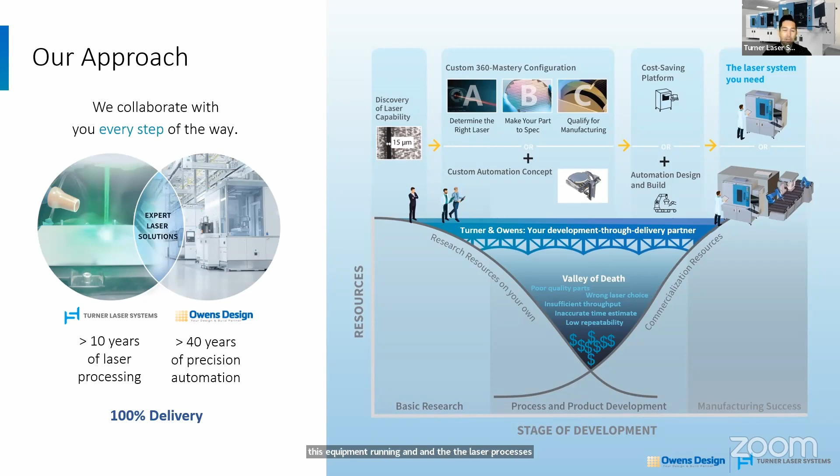This will be a critical step to avoiding the infamous valley of death, where essentially, manufacturing lines power up and you have this equipment running and the laser processes and systems just aren't meeting the specification if you don't consider things carefully.

So we have a methodology for doing this at Turner Laser Systems and Owens Design, and this is really based off of a 40-year process that Owens Design has built, where they look holistically at the technology, manufacturing, and business needs of a specific application. And then we break it down into critical phases. And often we'll develop these laser processes.

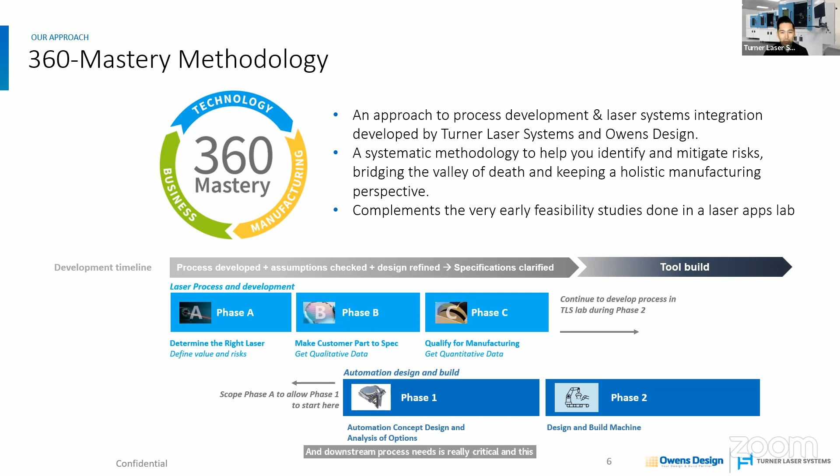We'll try different optics, different lasers, different setups, fixturing, airflow; they all make a big difference. But a lot of the times we'll develop that in parallel with the automation, and they go really hand in hand. And a critical thing that we've learned in years of working together with Owens Design is not to develop process or laser technology in a bubble, and really to work collaboratively with your automation teams. Understanding things like the upstream and downstream process needs is really critical. And this has led us to great success in deploying these solutions in large volume manufacturing.

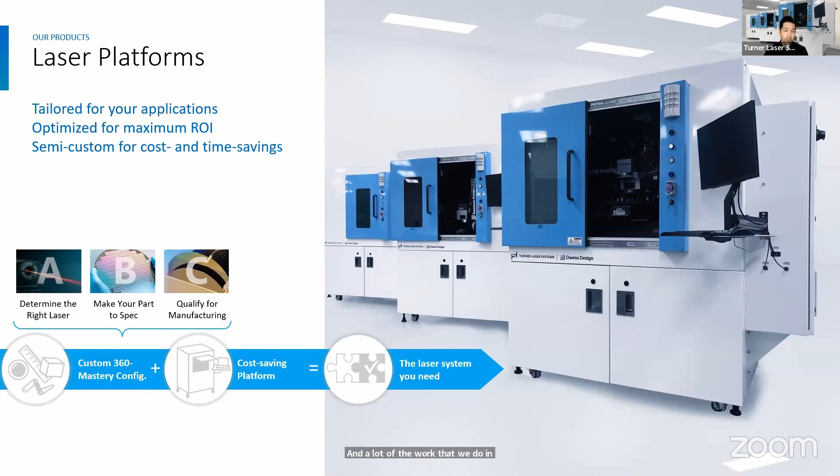Just a little bit about our laser platforms that I mentioned. We're a custom laser machine builder, so we tailor these machines to the application. And here what we're trying to do is select the appropriate laser optics for the application, so as to maximize the ROI from a commercial standpoint. And a lot of the work that we do in developing these phased development projects goes into that tailored configuration in all of our machines.

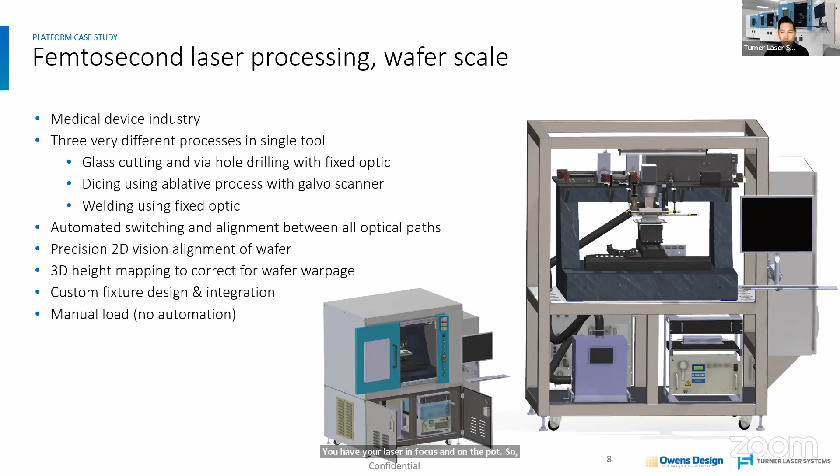Really critical to these types of processes, which we haven't really talked a lot about today, are things like motion control. So motion control, precision motion, things like vision systems, sensors as well, because a lot of times we have to measure the part before we can process it with a laser. We've been talking about things like high numerical aperture optics. It's really critical you have your laser in focus and on the part. So bringing all of these technologies together into an integrated solution is really critical in manufacturing.

Besides the laser and the laser process, often being able to feed materials into the laser machine is critical. And understanding things like, am I able to process the material from one side? Am I allowed to flip the material over? Can I handle the material in certain ways? All of these constraints that we have in manufacturing really affect the process and the laser solution that's going to be applicable. So we provide these automated solutions for feeding materials into these laser machines as well.

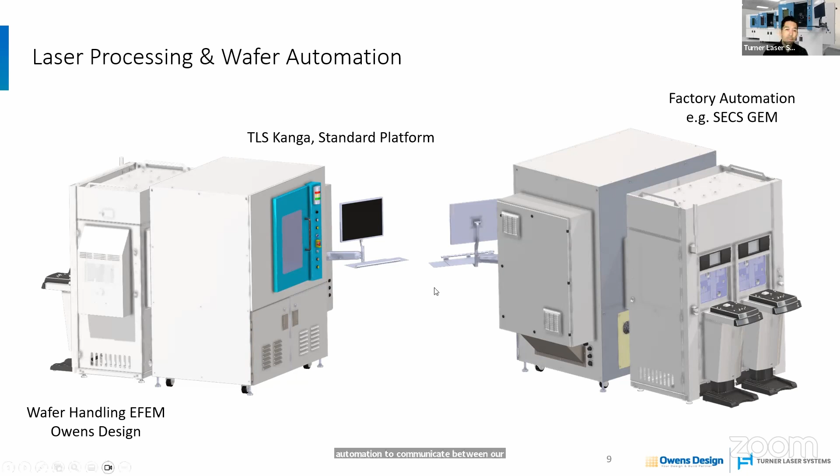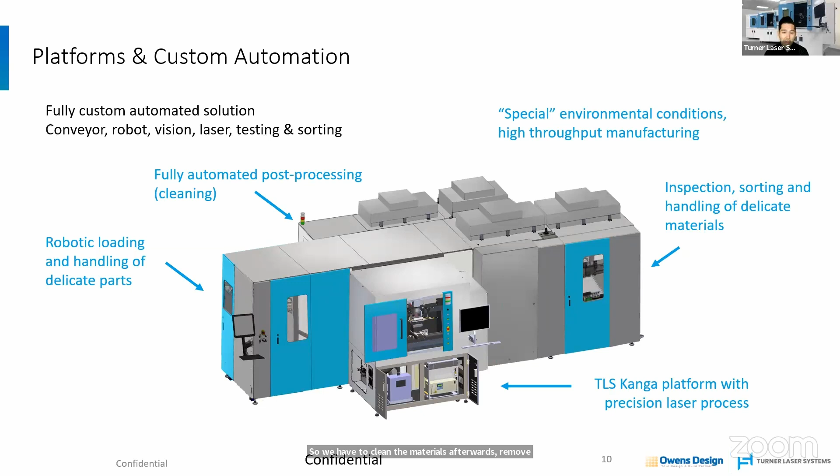And then we can, of course, do things like the factory automation to communicate between our automation systems and the full factory. And besides just standard wafer loaders, we can also do fully custom automated solutions. And this was an example of battery material processing that involved robotics, automated loading, unloading, laser cutting with femtosecond lasers, galvo scanners, coordinated stage motion. And then we had to post-process. So we have to clean the materials afterwards, remove the debris. Most of these ablative-based processes are going to create debris, and there need to be ways to handle, mitigate, and remove it in post-processing. So that's briefly about our companies.

And in terms of what we can do for you, and what you can do for us, we're really looking for partners, whether these are customers and users or suppliers, who align with this philosophy of approaching things systematically, methodically, and working through developing things to create turnkey manufacturing solutions.